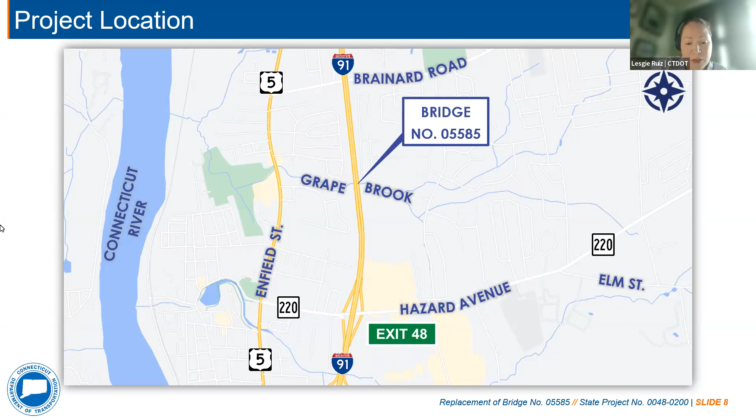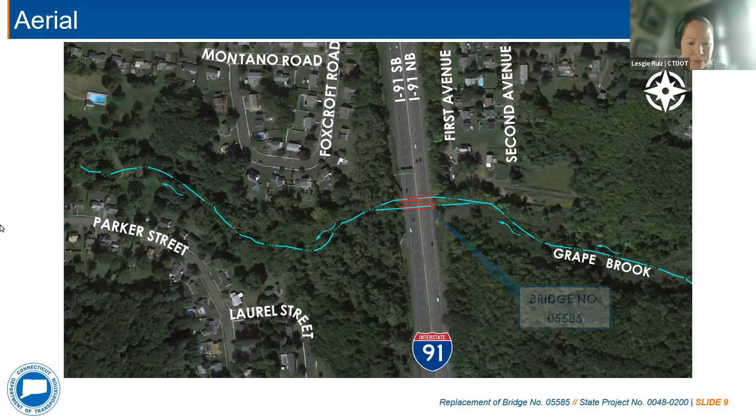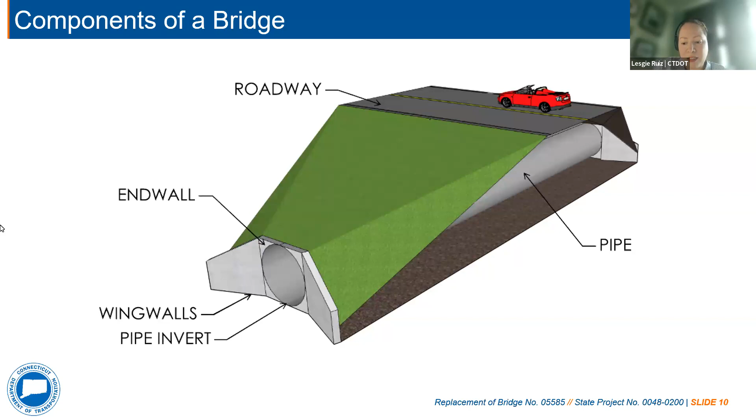In this case here, it's just an illustration to show where the road is and where the structures, for the most part, are located. You can see the end wall, which is basically a wall surrounding the pipe, supporting the pipe. And then we have the wing walls, which are supporting the embankment. And the pipe invert, which is the lowest point of the pipe in this case, is basically where the water flow is. And now Dan Pinto is going to be presenting the existing condition for this project.

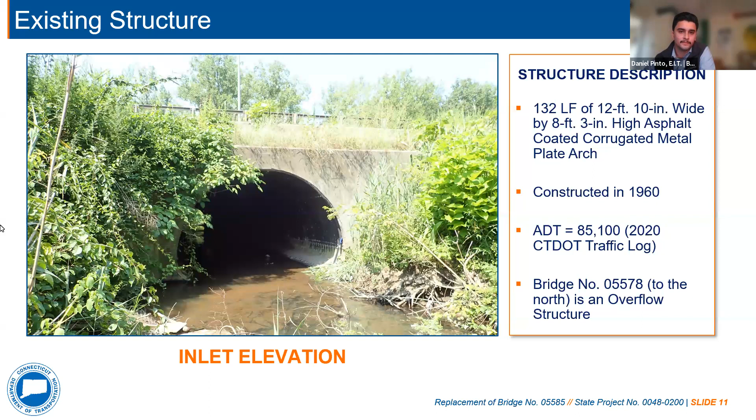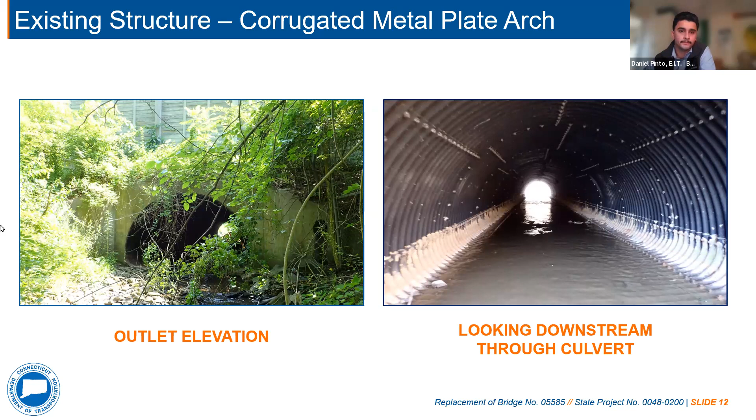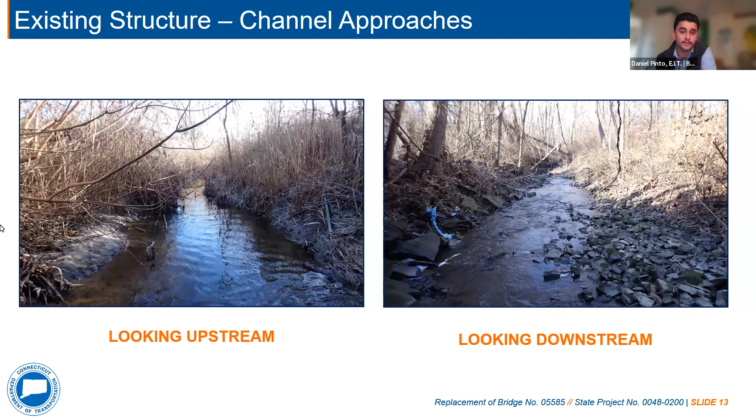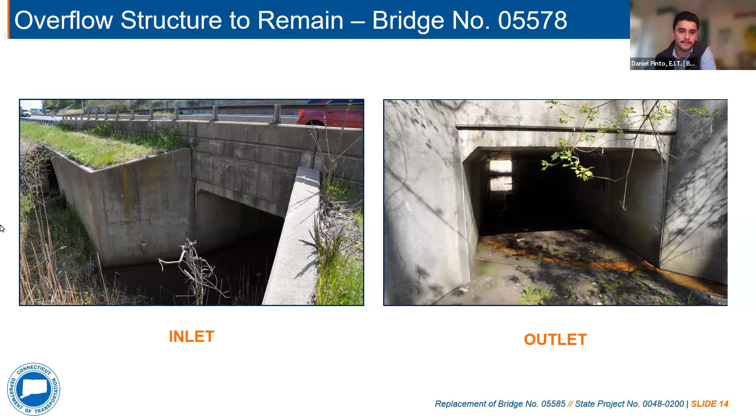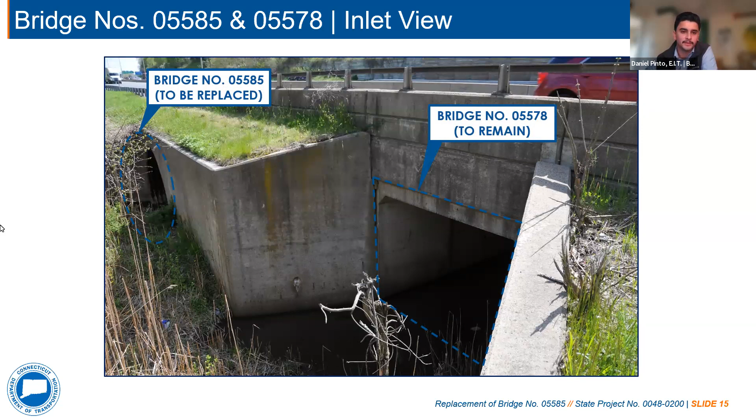The purpose and need of this project is to address the structural deficiencies. The culvert is rated a 3 on a scale out of 9. This means that the culvert is in serious condition and requires CTDOT attention. This is due to the corrugated metal plate arch exhibiting areas of moderate to heavy laminar rust and scattered perforations along the bottom and corner plates.

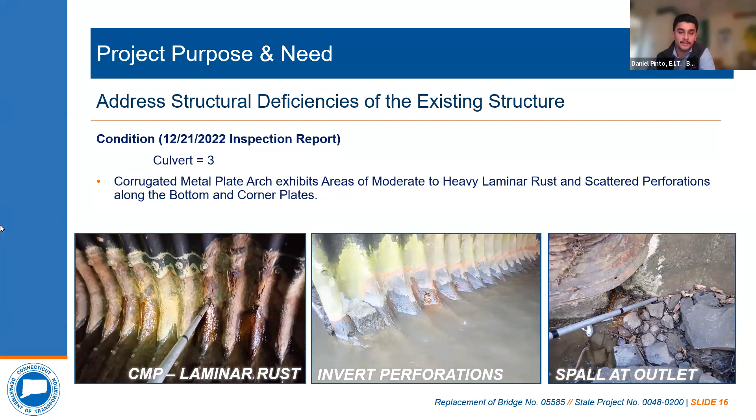In the next slides, we will review the proposed replacement plan for the culvert, and I will pass it over to Mike Woods.

Thanks, Dan. Hi everyone, my name is Michael Woods with BL Companies, and as Leslie introduced us, I am one of the bridge engineers with BL Companies here. Just want to reorient everyone quickly before we get into the proposed conditions. We were previously introducing the project where the top of our screen was north. We have now rotated everything about 90 degrees, so north is actually to the right of your screen, south on the left, east is the bottom, and west is the top. In this view here, we have tried to make things a little bit simpler for everybody.

In orange is our proposed structure. This is a new 12-foot wide by 10-foot tall precast concrete box culvert. It will replace bridge 5585 in its entirety, and we'll actually be shortening the length of the bridge.

In purple and to the right or north of our subject bridge is bridge 5578, as both Dan and Leslie alluded to earlier in the presentation. It is, again, to the north, and it will remain in place. It is not being rehabbed or replaced as part of this project and will be used during construction to handle flows.

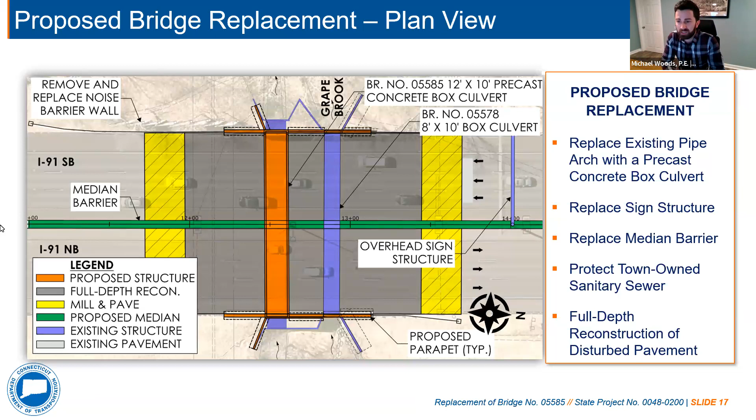In this view, we have the upstream elevation view, or the east view. This is us looking west now at the structure. Dan Pinto went through and we saw that image of 5578 with the close proximity to bridge 5585. In this image, you can see where we have the new structure in orange and the old structure in purple. Again, on the left, we have our new box culvert, 12-foot wide, 10-foot tall. And then in brown is our new traffic barrier, which will keep vehicles from essentially falling off the roadway, as we see on most bridges out there.

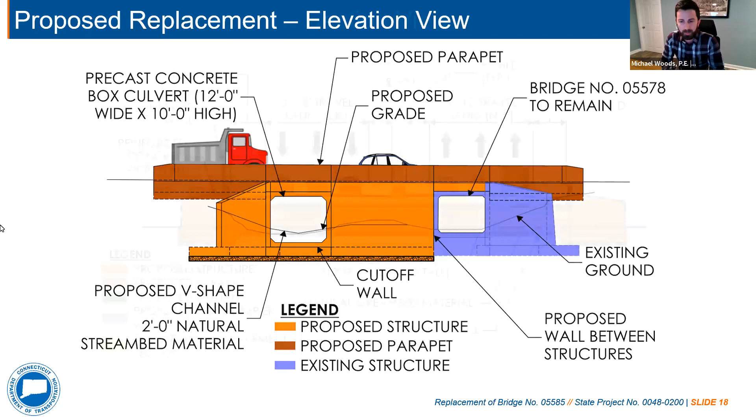And this is our cross-section view. My favorite analogy for this image is we're looking at the bridge as if it were a piece of cake, and we're slicing the cake and pulling out that piece and seeing all of the layers in there.

Here we have 3 lanes of traffic in each direction for 91, both north and south. We will maintain that existing configuration in the proposed conditions, same with the existing width. We are restoring the existing conditions out there. I-91 northbound has a 10-foot right shoulder and an 8-foot left shoulder, and 91 southbound has an 8-foot left shoulder and 12-foot right shoulder. On the 91 southbound side, we do have an existing noise barrier wall that will be restored as part of this project.

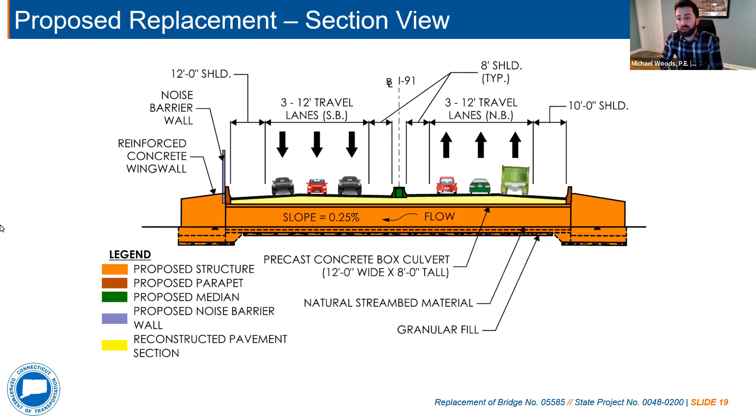All right, so how is this going to be built and how is this going to impact traffic? And I think that's what the majority of people on the call are interested in. So we'll be performing construction in 3 stages out here, and we will be shifting traffic in those stages.

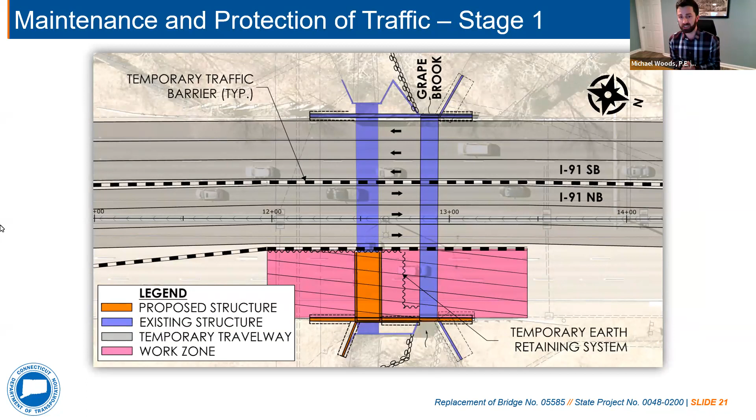Maintaining 3 lanes of I-91 traffic in each direction for a majority of construction. In this view is stage 1, where we have traffic shifted to the west. Again, just orienting everyone, north is to the right of our screen, south is to the left. On our next slide here, we have a zoomed in version where we can see our work area highlighted in pink, and then orange shows the limits of the proposed structure constructed in stage 1. Purple is the existing structure that's remaining part of that stage.

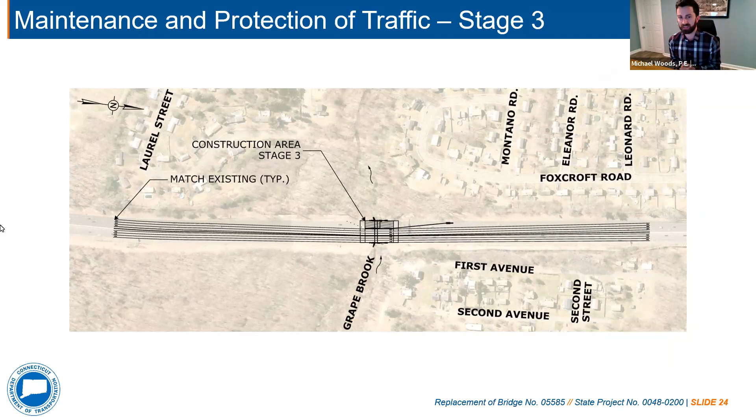And then our last stage here, stage 3, we have all of the traffic shifted to the east. Again, 3 lanes in each direction while we finish up the rest of the construction on the west side there. And then in our zoomed in version, again, our pink work area, and the last third of our bridge, and then the downstream wing walls and end walls there.

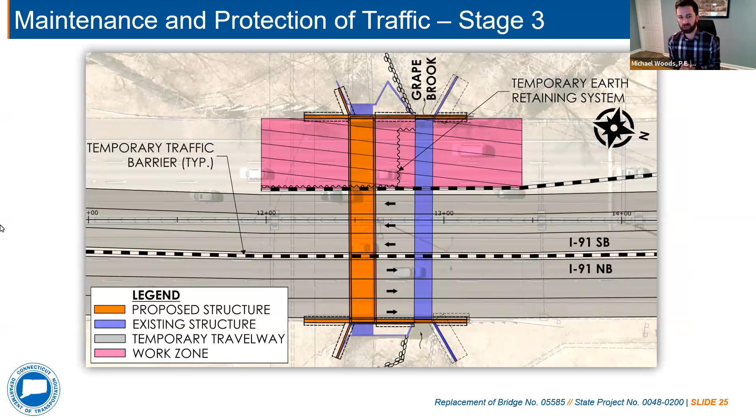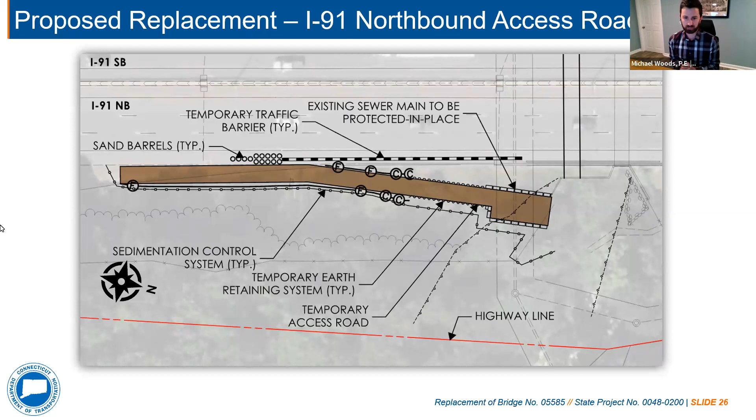Shown here we have our downstream temporary access road, a similar idea as the upstream one. Again, it's to allow the contractor access to the outlet of the culvert, as well as a place to store materials and equipment on site while they're working.

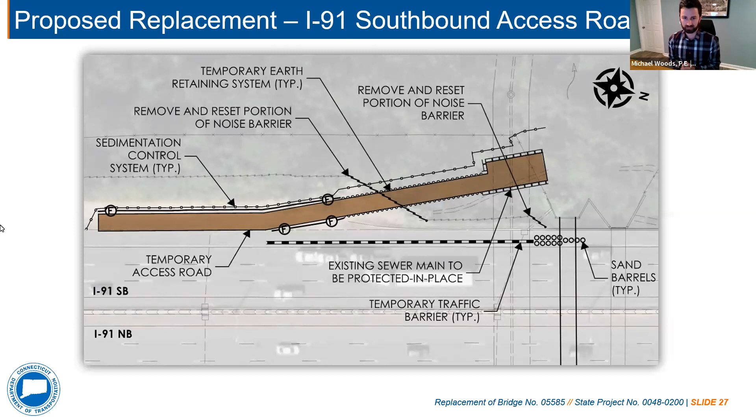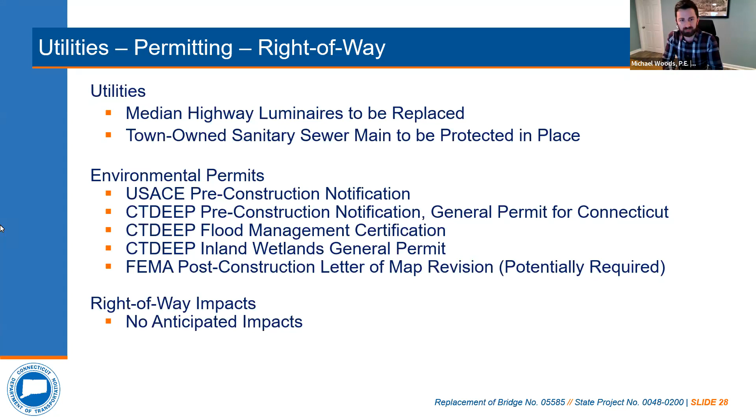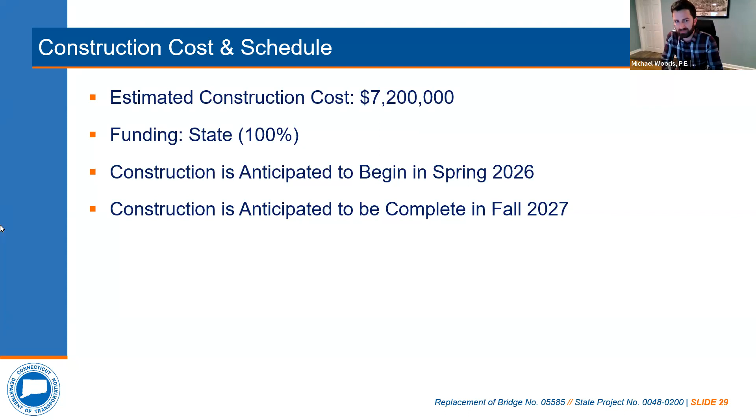And now I'll be handing the presentation off to Jennifer Usher, who will be the MC for this evening's Q&A session.